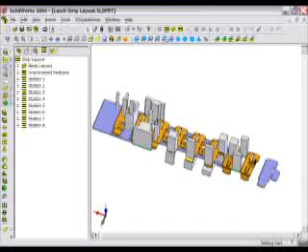Stage 4 is to create the die set around the punches in the strip. We have the choice to bring in a pre-existing assembly or utilize the die set wizard settings. Also, we defer the hole generation, so all the clearance holes will be created after I start to create some of the standard components. That will save us some time.

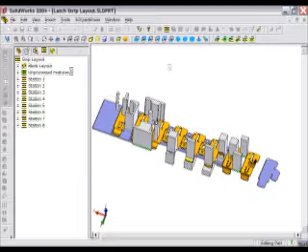At this stage, we're going from a part mode to a full assembly. This assembly will create the plates. In this case, it's very generic. And then we'll start to bring each one of the punches over into the assembly.

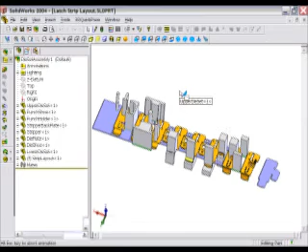It is naming the punch or the bend based upon the codes that were set up in the project info. It's also creating its own directory structure so that you can keep the jobs separate, and of course you can determine what parts are custom and what parts are standard.

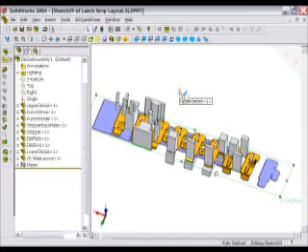Also, it's checking if any of the parts are alike. Therefore, it will give it the same name, and it will not copy, but it will instance it, so your bill of material would be correct.

It's copying them over into the assembly, and then we can start to create our standard components.

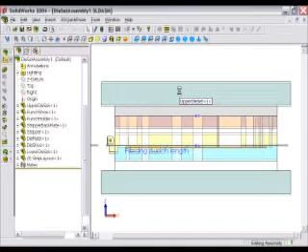On the left side of the screen, you can see that our feature manager has been converted from a standard feature manager to the component manager. Very similar, except now you're looking at the component level. You can see that all the standard plates and then all of our components have their own holding, or own placeholder.

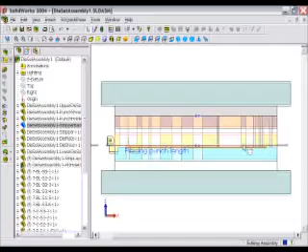At this point, it's very simple. We need to start to lay out some standard components. So we're going to go and utilize a quick press tool called Layout Sketch. On the top plate here, I want to lay out 6 fasteners.

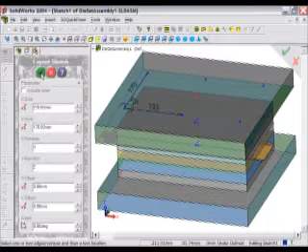This is a nice handy tool that allows you to find the center of the die and quickly type in an X and Y series of coordinates, which I'll do 170 and 150, and I'll do 3 in the X direction and 2 in the Y direction. These points will drive our components.

To do standard components, select on our standard component tool. We can pick from catalogs or favorites list, which is a shortcut. Instead of digging through all the different folders, we could set up basically shortcuts.

We'll pick up a standard fastener. This is a design table driven fastener that is driven by SOLIDWORKS configurations. As you can see here, there's a numerous amount of different options for this one part. That's standard SOLIDWORKS functionality. The reference face is the face that we're drilling from, and then finally the sketch pattern.

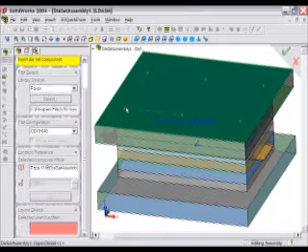It's going to place one so we can preview it. Now it gives us the choice to flip it and offset it.

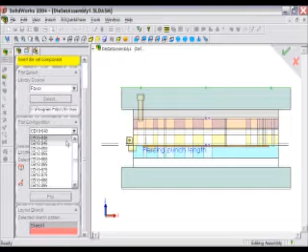The preview gives us a real good chance of visualizing and then of course adjusting, and in this case I need to go a little longer. Once we're okay with that, tell it to go, and it places the 6 fasteners without the holes yet. Remember, I deferred the hole generation till later.

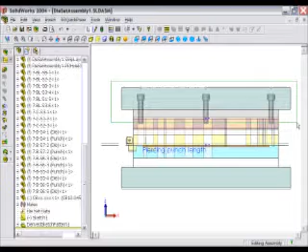We can reutilize that sketch over and over again, or we can create our own sketch without utilizing the layout sketch tools. So for instance, if I wanted to put a series of guide pins in, I might want to hide some components.

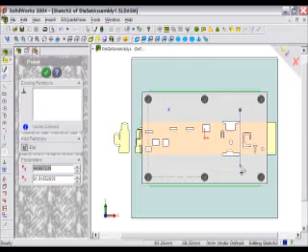I pick a face, start a sketch, and I could just use the standard SOLIDWORKS point tool and place a series of points. Of course I can dimension to them, but for time's sake we'll just lay them out. 4 separate points. Close that sketch, and now we can put in some guide pins.

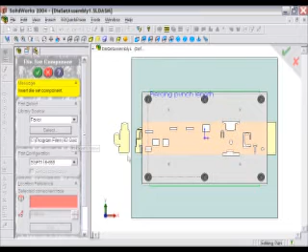Going back to our catalog, favorites list, pick up some guide pins, tell it what face we want to select, and then of course what pattern.

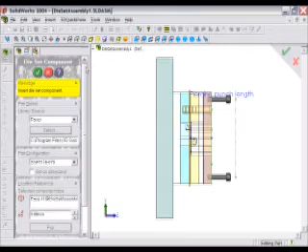Switch some views around so you can see what's happening. Here we have a preview, and maybe it's a little bit short, so we can extend that out. Once we're satisfied with that, tell it to generate the other 3.

Let's add the components back that we hid.

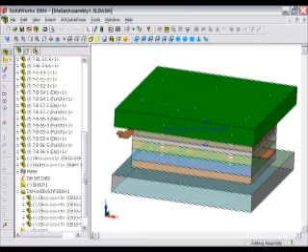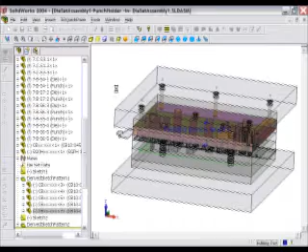Now we can have Quick Press create the details. And what the details in this case are, all the clearance holes for each plate relevant to the function of that plate as we set up in the punch design. And of course the clearance holes for the screws and for the guide pins.

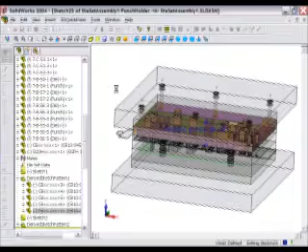Once this is complete, we can step into cleaning up some of the plates, splitting them, creating inserts, clearance, and it takes a couple minutes to complete this.